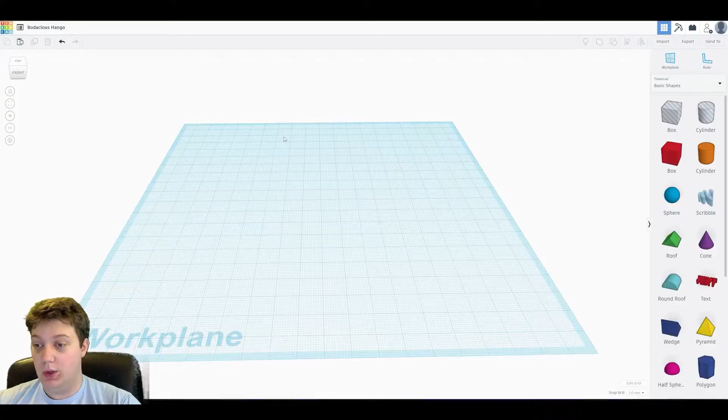I know some of you might want to start 3D printing miniatures for things like Dungeons and Dragons, so we're going to see if we can make some medieval weaponry, starting off with a sword.

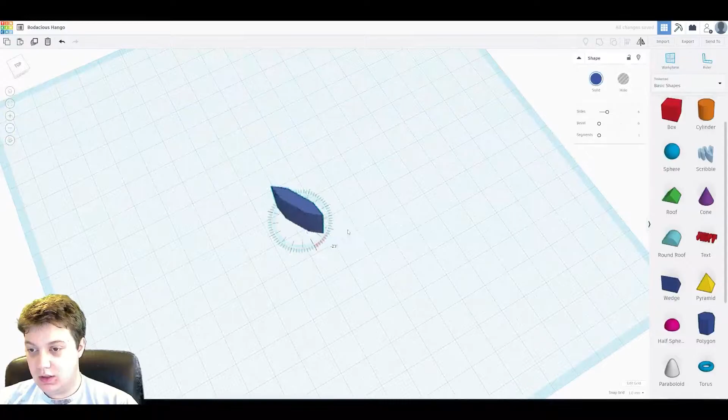The main body of the blade is going to be a polygon. We can leave it at 6 sides. I'm going to squish it down this way, making sure to do both sides so it's an even number. Right about 4 is good. You do want to make sure it's a little thicker than you might want, especially for 3D printing.

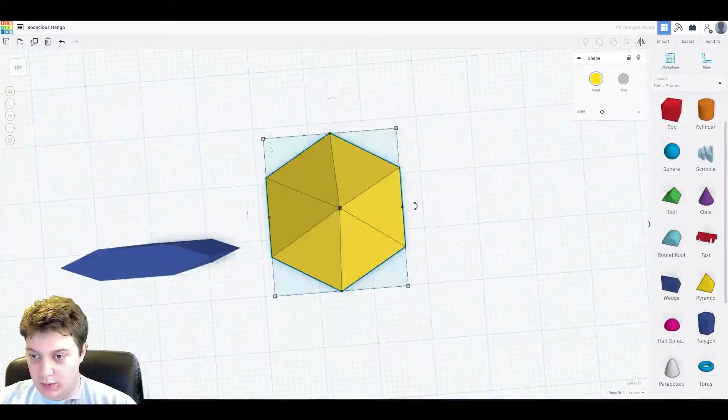Then for the top of the sword, I'm going to use a pyramid and up the sides to 6. Unfortunately this one is a little wonky, off on a weird angle, so I'm just going to do the best I can to match up. You can tell when the outline box matches up with the side, and then we can drop that down.

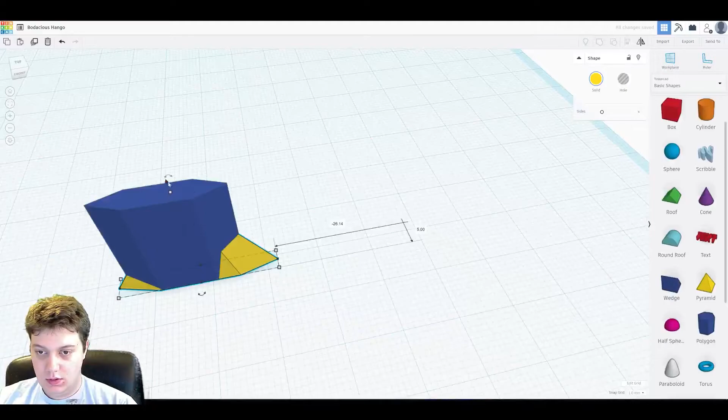That's 8, we want to match it to 4. Yeah, there's 4. Rotate that 90 degrees, bump that up, and let's make this a little wider, 22, and we want to match that.

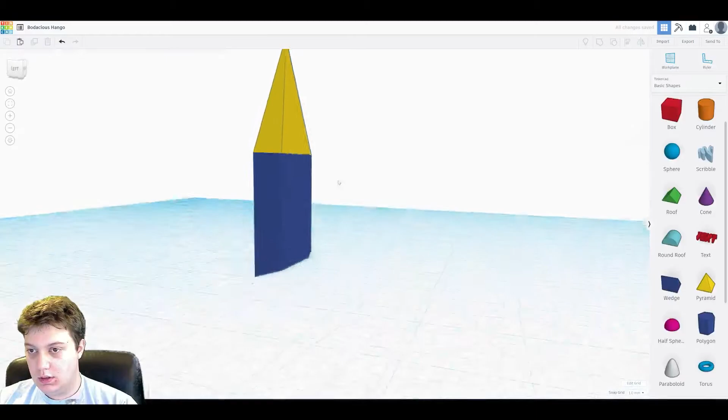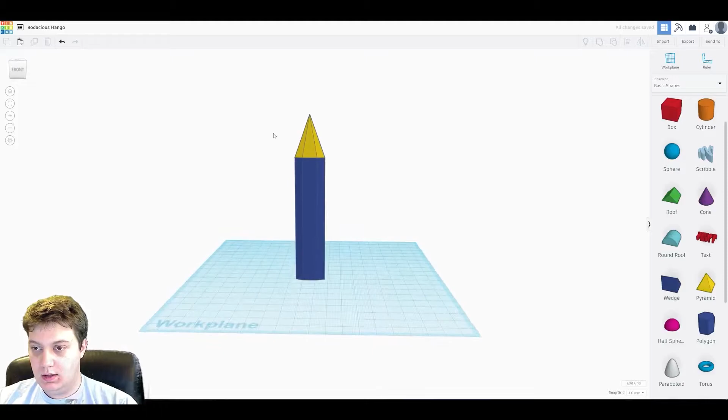Once all of that is handled, we should have a pretty good match. Now I'm going to make this point taller, just as an aesthetic choice, and then take the whole point way up and extend the rest of the blade up to meet it. And that's looking like it's starting to become a short sword.

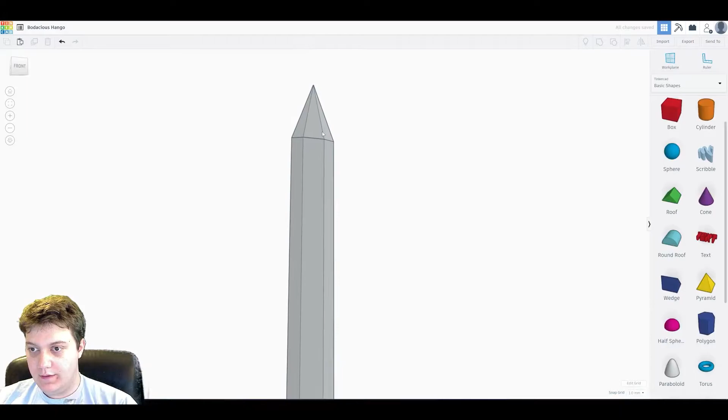Now we can probably make it a little longer to get a proper long sword. The really defining factor of a sword comes from its hilt, so we have a couple of options that we can mess with.

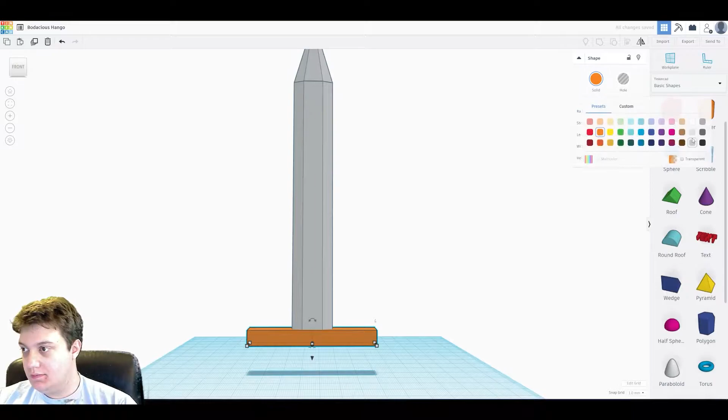Probably the simplest is just to grab a block, flatten it down, stretch it out for a basic crossguard. Make it something, I don't know, give it like a brass look, or just a slightly darker steel. Go like that, and that's not terrible.

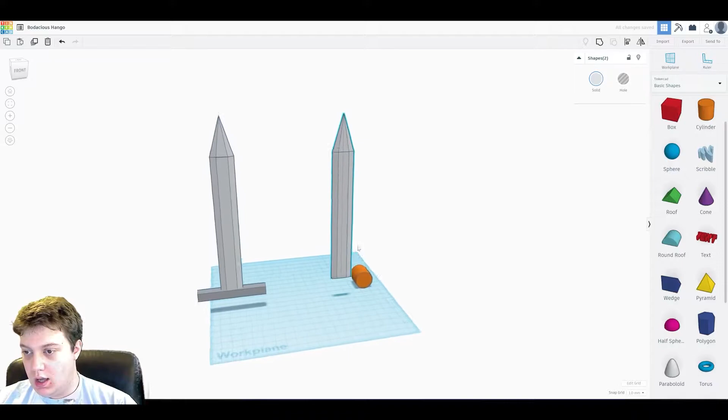You can also make a bunch of different options, so I'm just going to copy the blade over, and you just need to make one of these. Pick your favorite, or make up your own. There's no hard set rules on what your sword needs to look like.

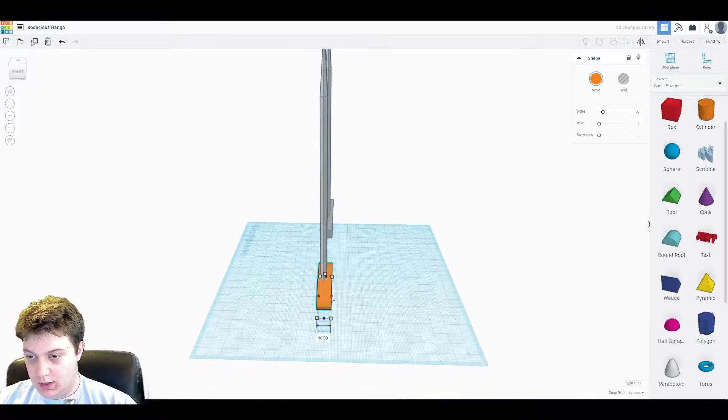If we do something like this, we grab a cylinder, make sure it's reasonably proportioned. Also try to remember that for 3D printing you kind of want it bulky.

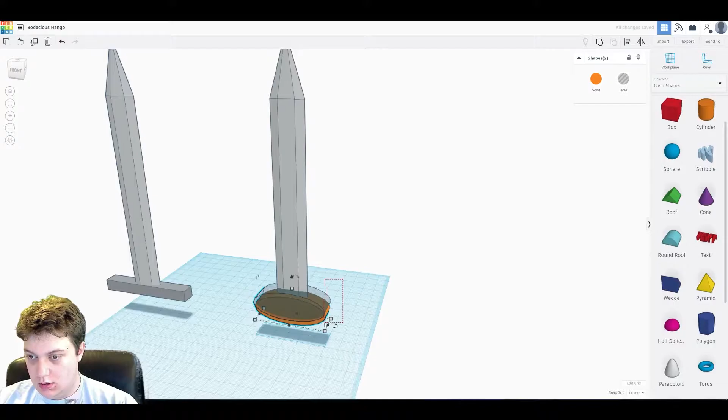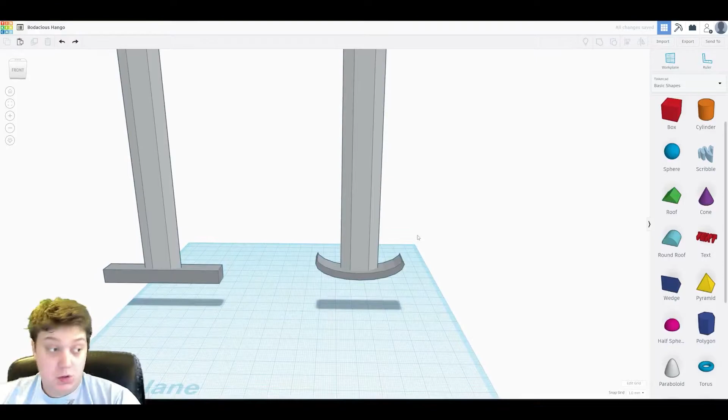I'm going to copy and paste, make that a hole, and give us this sort of crescent look. I'd say those are the two main ones. You can also take this, flip it around 180 if you'd prefer a more swept hilt look, or just come up with whatever you think looks good.

Then we can just grab a cylinder. Now I'm going to select all of this. Well, actually, let's add the pommel first. The pommel's just a simple cylinder turned on its side.

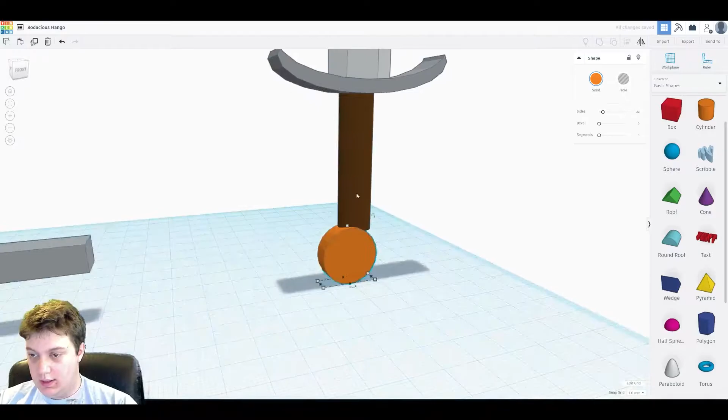Flatten it down. A disc pommel like this is very common. Now, as you can see, I wasn't too worried about lining everything up, because we have that align tool, that will be your best friend.

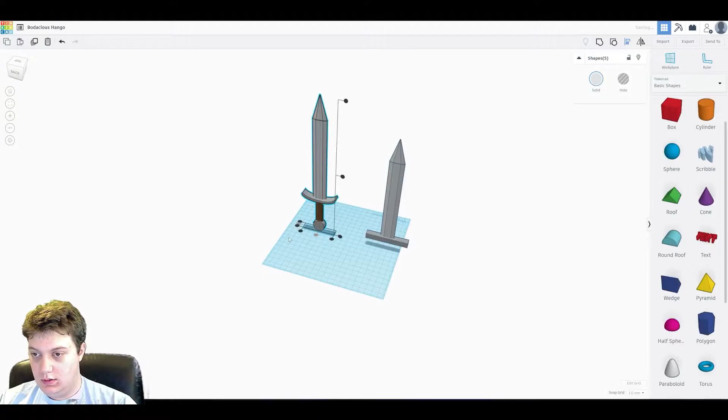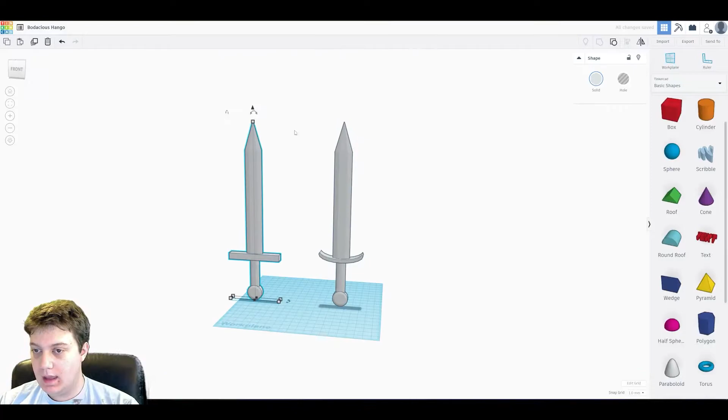That is a sword. I'm actually going to add a bevel, and I can keep the segments at 1. There we go, once they're grouped, make sure you bring back the color. There we go, 2 different sword types, make up whatever you want.

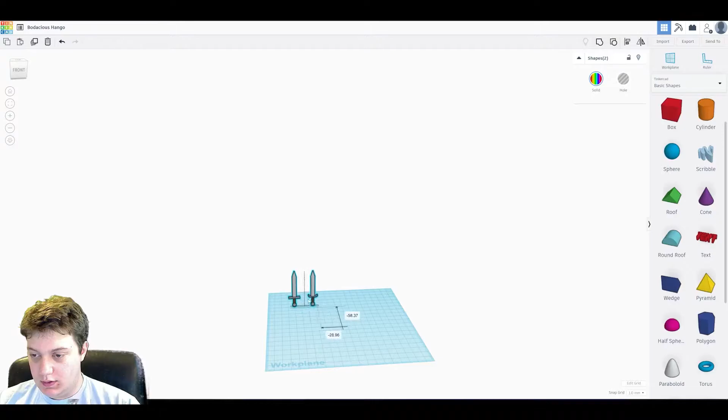Alright, I'm going to scale these down now that they're groups, and just move them aside, because not everybody uses swords. So let's talk about some other options. If you're playing some D&D, you might want a bow and arrow.

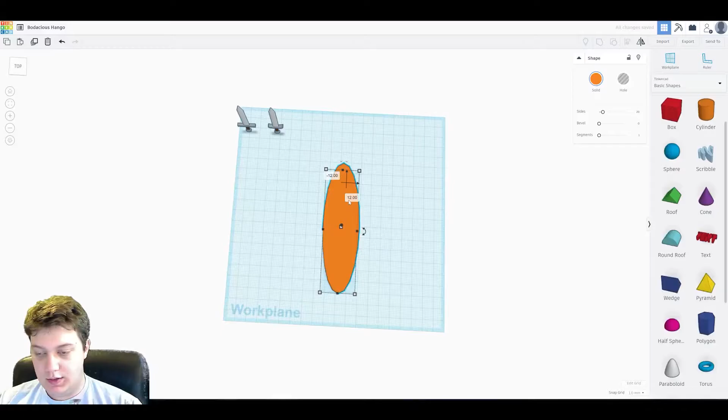That's fairly simple. A bow, if you're thinking of the English longbow type thing, is just a stretched out cylinder, which we can copy and paste, and then chop a hole into. Honestly, that's basically all you need.

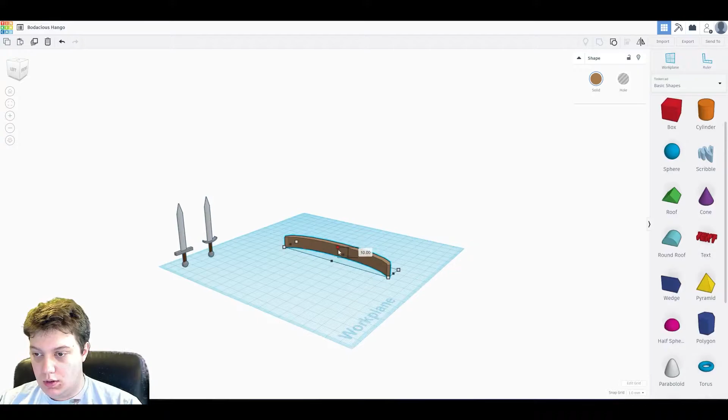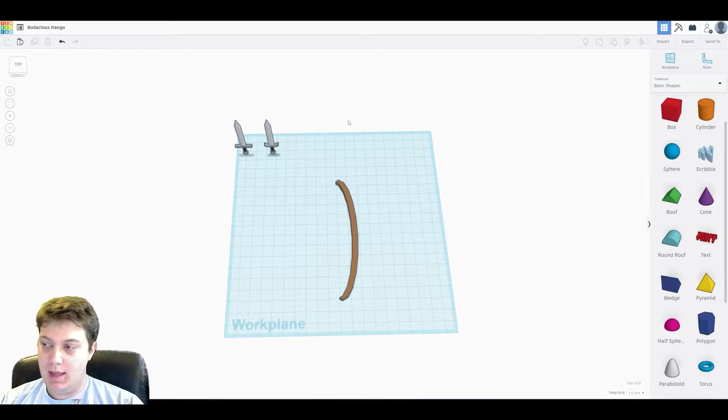Quick note about that: you do want to make it fairly thick if you're 3D printing, and most of the time don't bother adding a string if you're 3D printing it. That's just too small of a detail that it won't show up, and it will just mess up the printing. So you don't need the string, it's fairly straightforward even without it.

What's nice about this is we can sort of scale it up this way, and it looks like it's being drawn back instead of just sitting there.

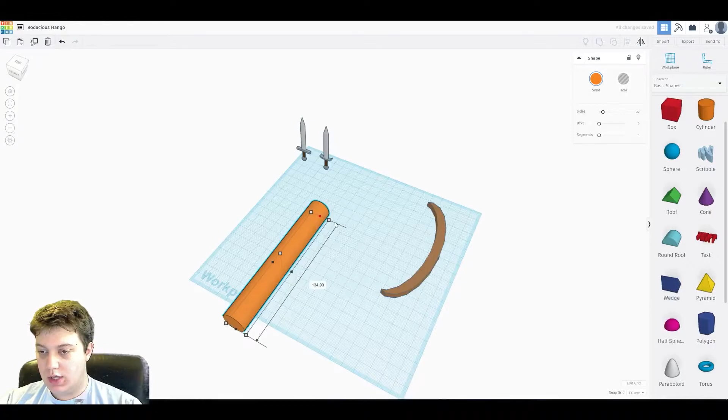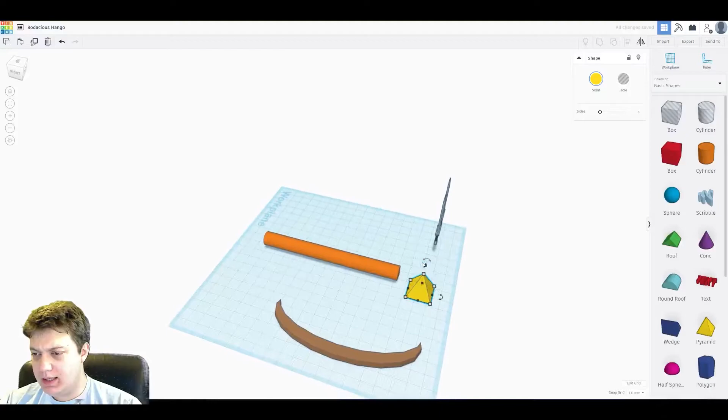Arrows are fairly simple. Just stretch out a cylinder to get the arrow shaft, and then I'm going to use a pyramid for the tip. You could use a roof type instead, but I like the pyramid, it's just a little bit more accurate.

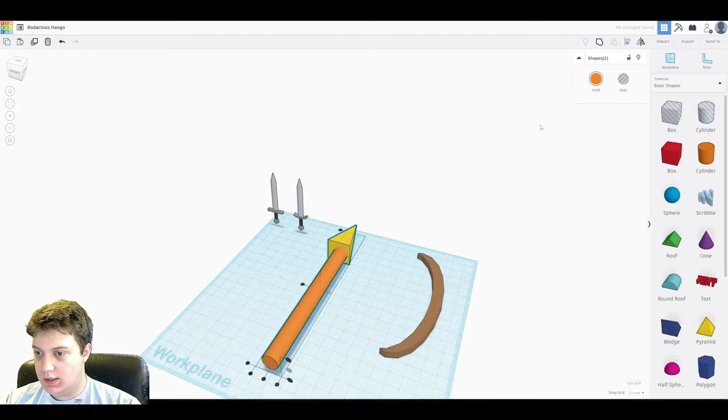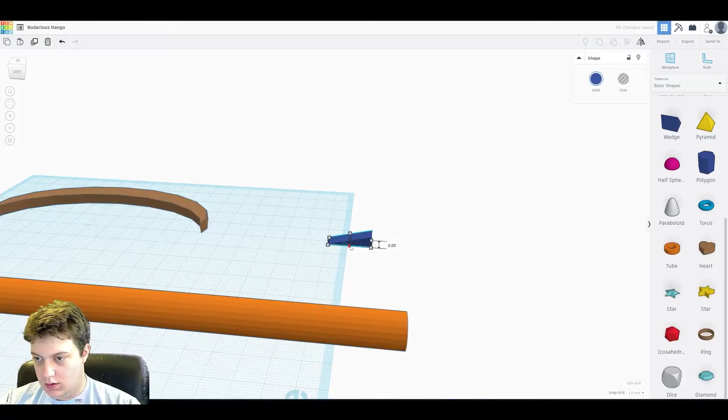And then I'm just going to select these two and align them, it's just the easiest way. There we go. Now then, to add some fletchings, take a wedge. We're going to scale down these two, but then we want to scale up overall.

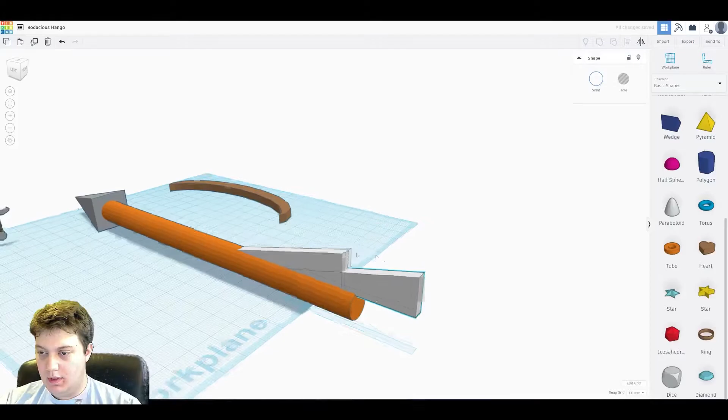The fletching part is honestly something that you might want to skip if you're 3D printing this, just because it's possible this might be too small.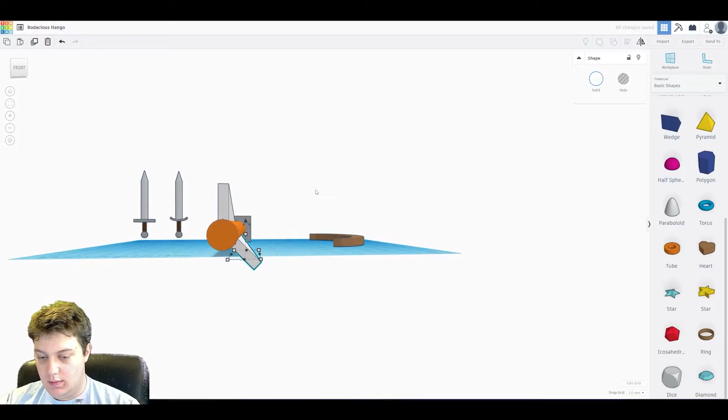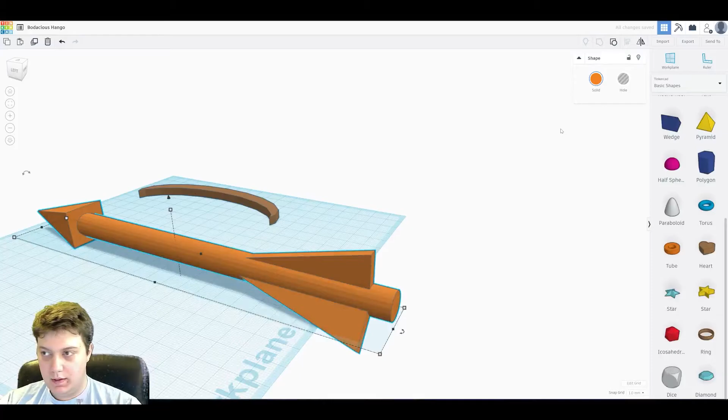You might require some trial and error to see what works. Then we can select all of this, make it a group, bring back the color.

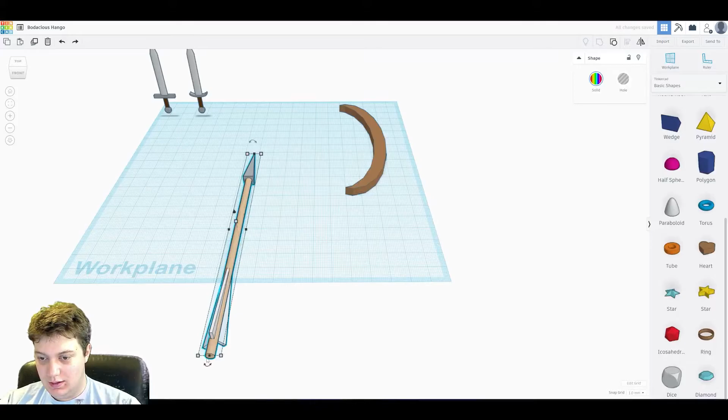Maybe make the arrow shaft something a little more reasonable, scale it down, maybe lengthen it. That's like a javelin, don't necessarily need that. There you go, you have one bow and an arrow.

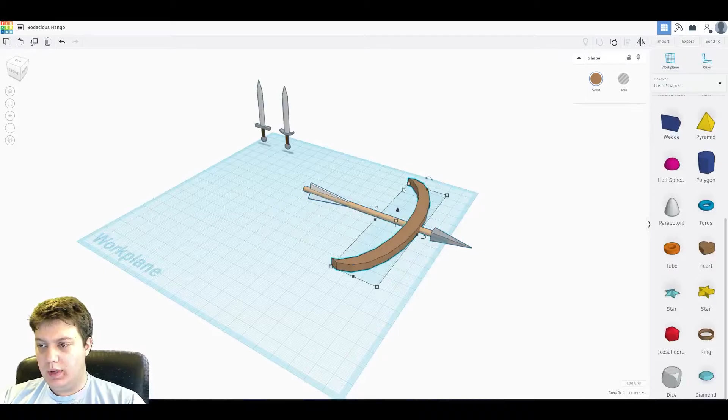I know these proportions are a little exaggerated, like the arrowhead is pretty dang huge, but that's important when 3D printing because, especially for miniatures, if it's going to be this big, you want those exaggerated features to really stand out. Otherwise, it's like, well, you've got a stick.

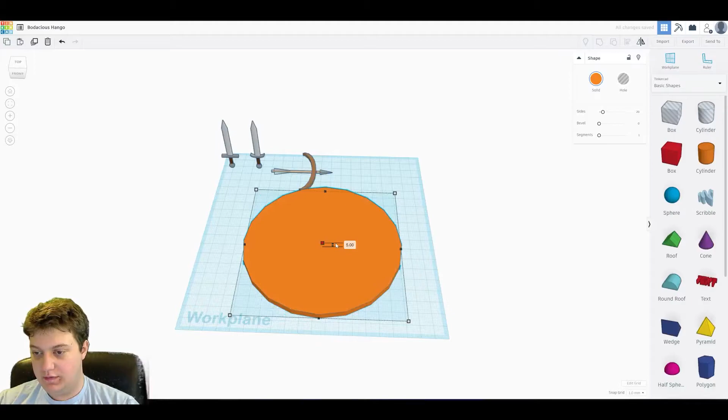For a Viking type shield, that's simple enough. Scale up a cylinder, flatten it down, and honestly, that's pretty much it. It might be a good idea to add a half sphere right in the middle.

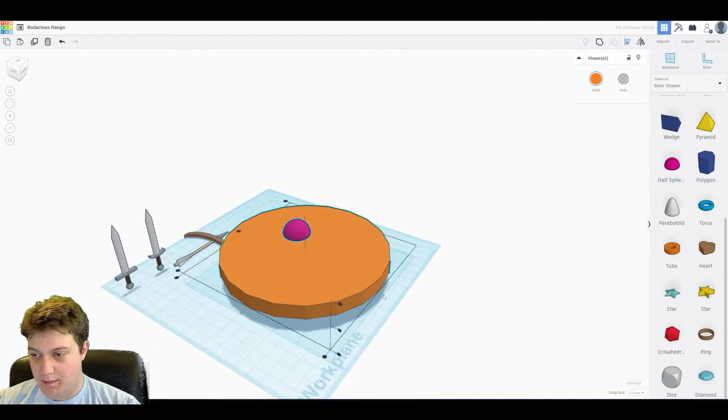Because they actually had a metal cap that would go on the very center of shields, because they would actually cut a hole in the back of a shield for your hand to stick through, and hold on to a handle in the middle.

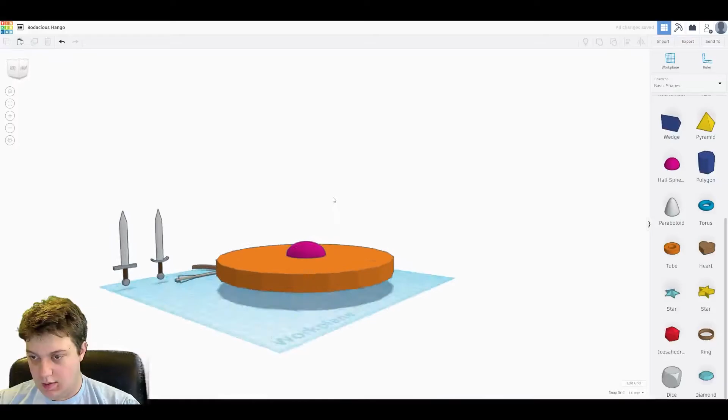And again, with 3D printing, if you intersect something, that's just going to fuse the material together. So make sure you always want to err on stuff poking into an object instead of hovering.

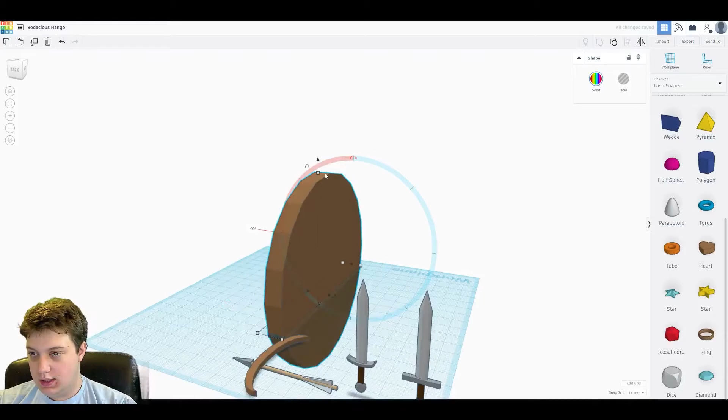If you were to print this, there are two different methods you can do to attach a shield. You can either put it directly on an arm, so if I just grab a cylinder to represent an arm.

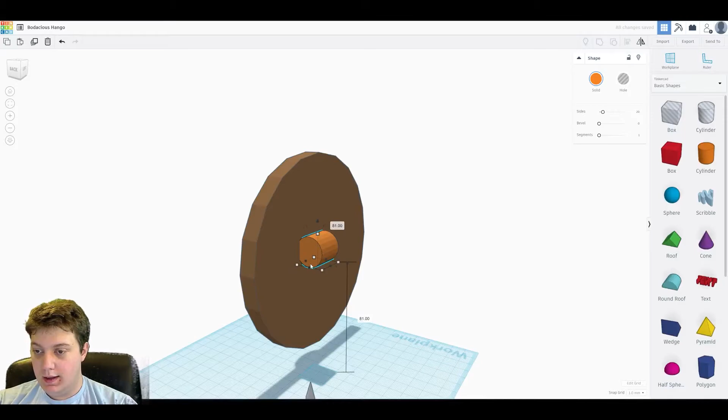If you wanted a like arm mounted shield, you could do this, but you want to make sure that it's sticking into the shield itself, maybe by quite a bit, because that's where it's going to be supported from.

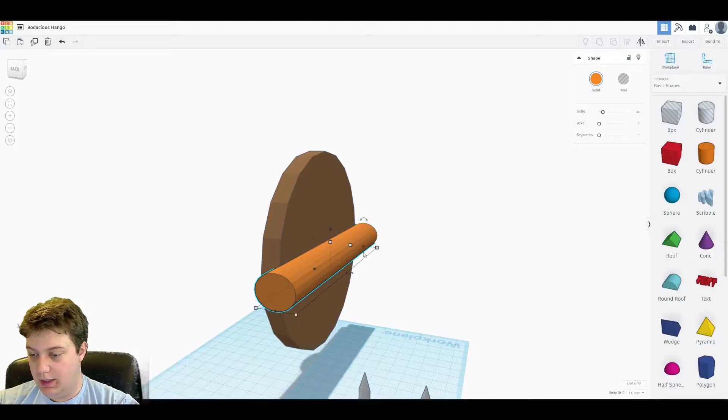The other option is to give it a handle, which can be done either by just doing something like this, making sure they're all aligned, and just adding something to it so that you can intersect with other objects.

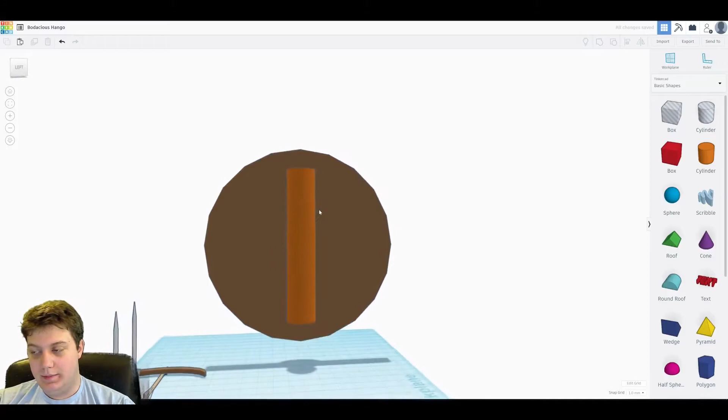Or you could even shove it out a little bit and then maybe add a box in to bridge the gap, just to separate it out a little. It doesn't have to be a box, but...

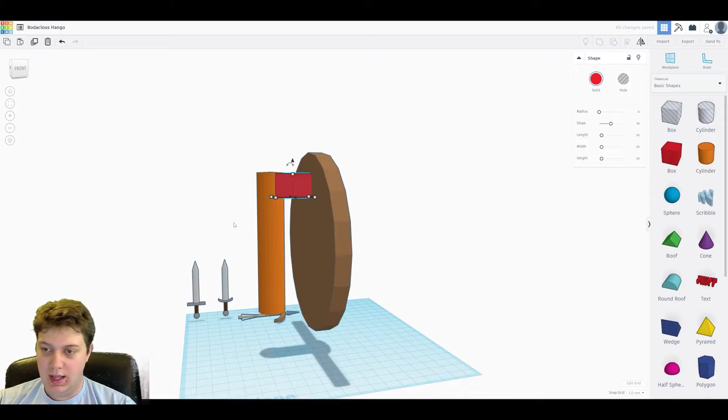Yeah, I wouldn't recommend this. Could be a little less stable because depending on which way you're printing, this gap could mess things up. So I would recommend with the first two options. I'm going to go with this one, just so you can poke a hand there. We can even bevel this and make it look a little bit better.

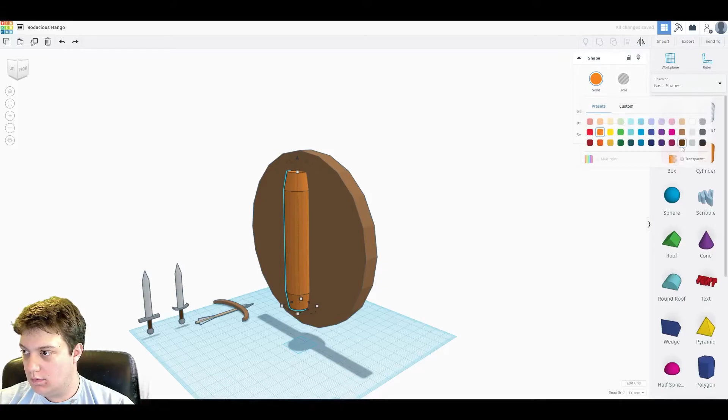For a more traditional knight shield, like a kite shield or something, that can be made. Why don't we start with a cube?

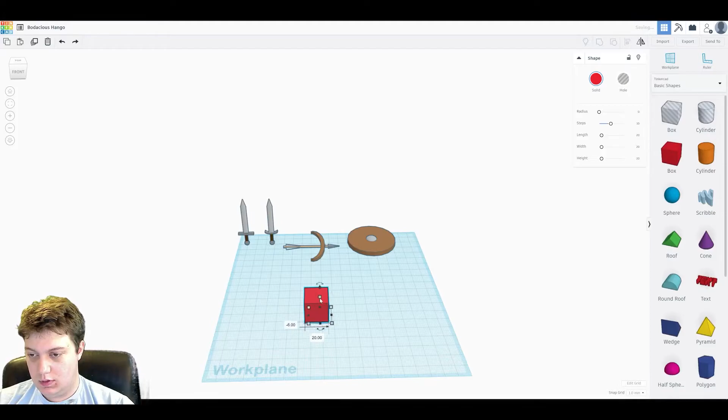I'm going to squish it down, make it bigger, just so we can work with it.

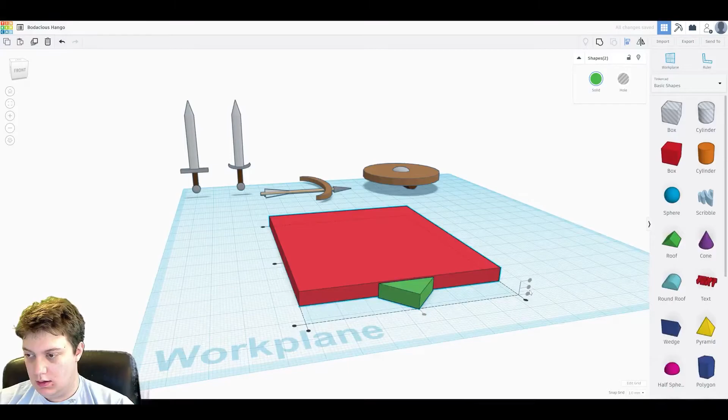And this can be accomplished by adding two roof pieces. There we go. And that's already getting to look like a normal kite shield.

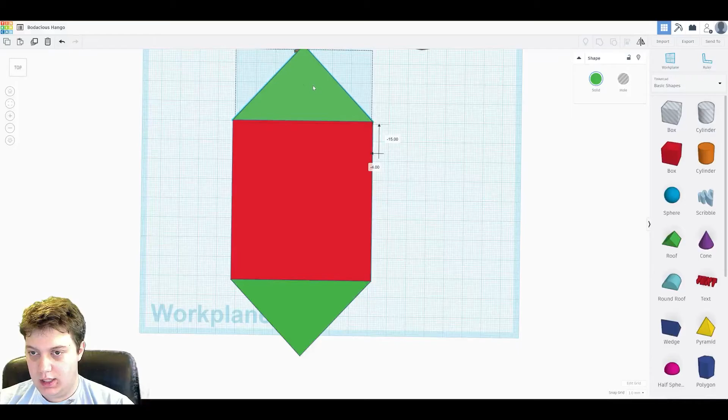Or a normal like shield that you normally see knights using. I'm going to throw another copy of the roof piece up at the top and really drop that way down, just to mix up the shape a little bit.

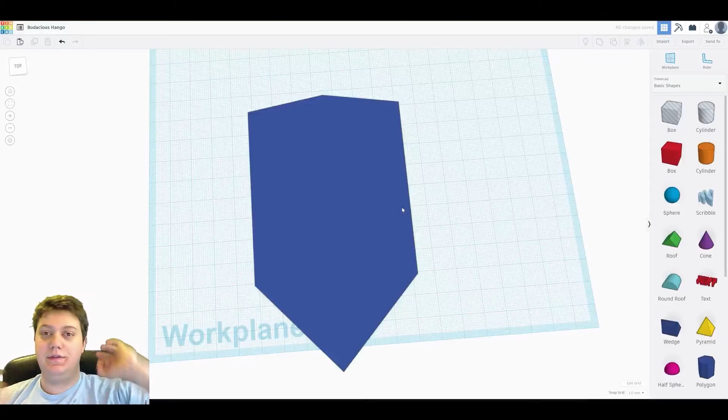And then once we make it a new color, maybe a blue, or make it a darker blue, and group it, that gives us a much more defined shield shape.

And then the same process can be applied to adding a handle. You could even use this scribble tool, maybe add a design of some sort.

Maybe we could draw some sort of like dragon out here. Add some wings.

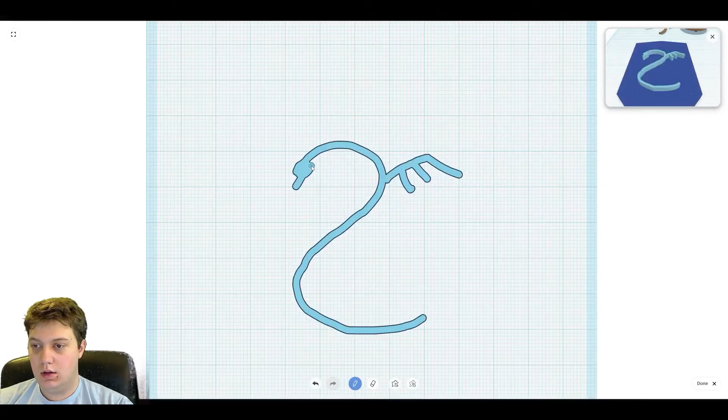Because having designs on shields is actually fairly common. And feel free to mix it up. Be creative.

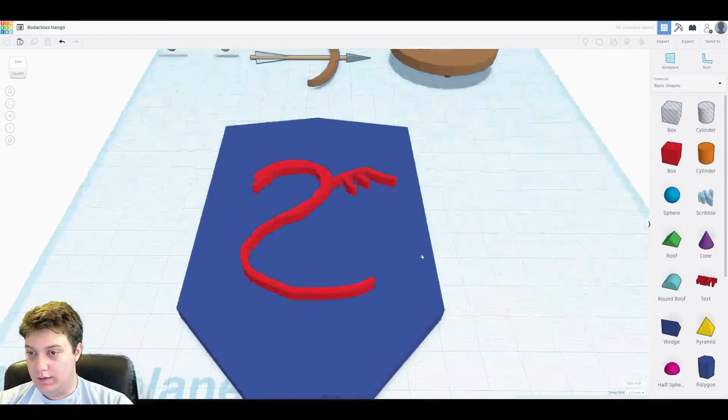Now, I know in many games, not everybody uses weapons like this. There are also spells that can be cast and all sorts of things like that. So why don't we make a book? That can be done with a couple boxes.

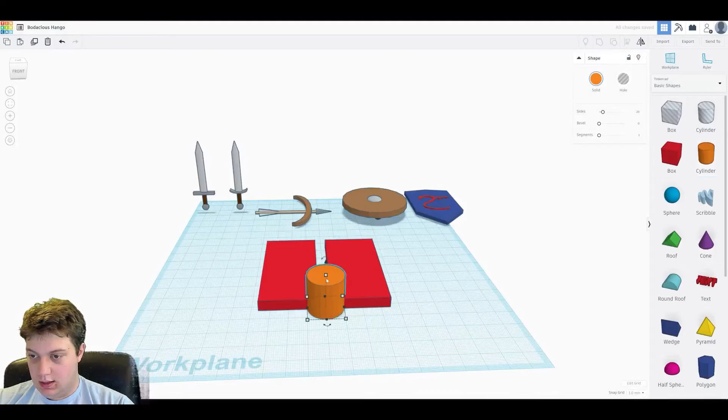And a cylinder in the middle will give us a sort of book frame that we can work with.

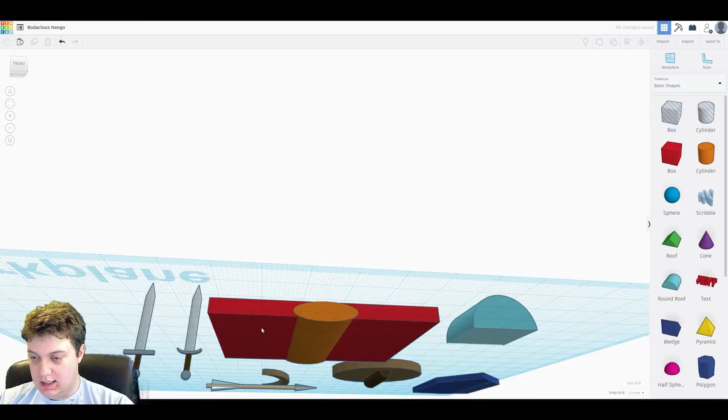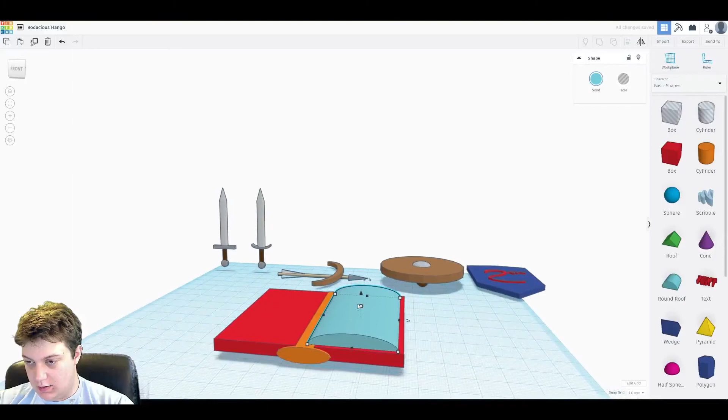Once we flatten it down, you see how it sort of gives that rounded, like book shape as the pages fold up and meet back in the middle.

Cut and paste, there we go. We can align it by eye. That's fine.

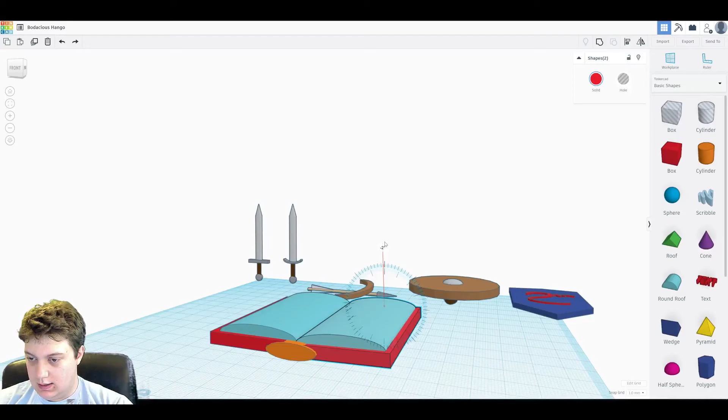Now, what we can do is we can select one side and tilt it just a little. Do the same thing with the other side.

And then once we adjust for the colors, this will give us a wonderful book cover.

I'm going to make it a purple cover. And then a light...

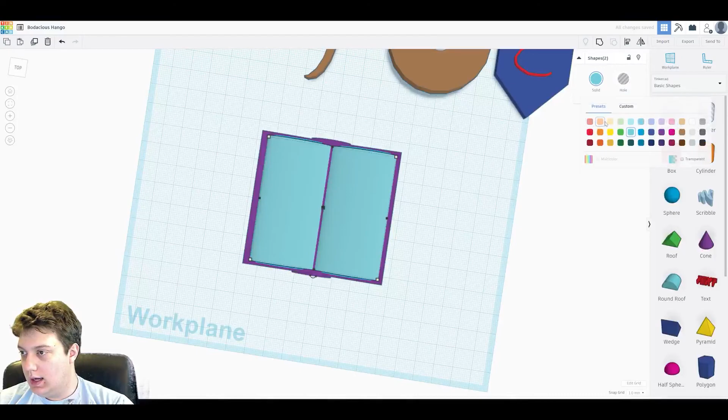Parchment-esque inside. And then this could be held by one of your characters and give you the nice spellcaster aesthetic.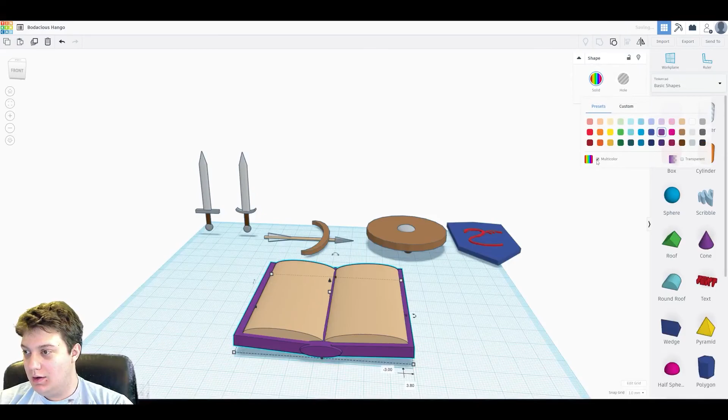And don't forget to group everything so that you don't lose your pages somewhere. Same thing with the shield. Feel free to embellish and add stuff on the cover of books.

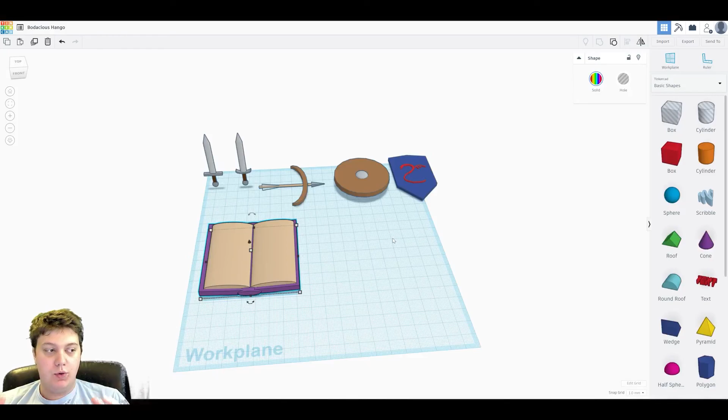And with all of this, you can figure out other weapons, like there are spears and glaives that you could, maces, that you could easily make for your miniatures that you want to print.

Alright, so you should be all set to equip your adventuring miniatures for printing. And that should make your characters a little more unique, depending if you're a spellcaster, a ranger, fighters, rogues, whatever.

Feel free to use your imagination.